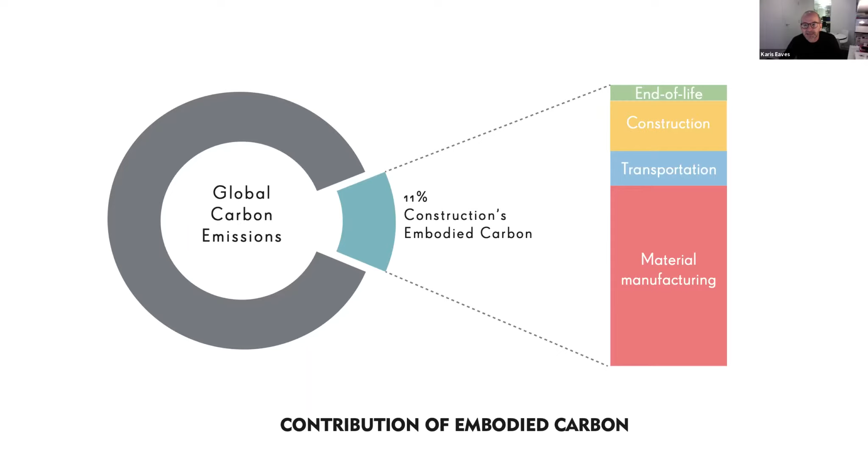We know that at the moment, primarily across the Western world, the carbon of buildings is measured through their operational carbon. Yet over time, as we get better at generating energy from renewable sources, we realize embodied carbon is going to be an increasingly serious issue from where we are now. So that 11% will very quickly grow exponentially unless we do something serious about it.

We know as construction professionals the kind of responsibility we have individually or collectively. This is thanks to Chris Wise, the engineer, for these figures, but it's applicable to architects as well as engineers. I don't want to put Kelly completely on the spot here, but going vegan for each of us consultants will save around 2 tons a year, reducing our carbon footprint. Yet an engineer is typically responsible for around 2,000 tons of carbon a year.

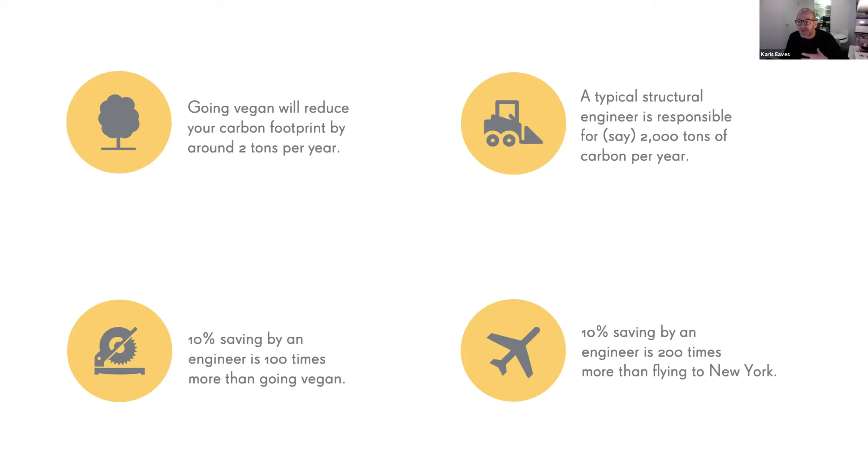By making a 10% saving in the embodied carbon emissions of your designs, you can make an engineer 100 times more vegan—essentially making 100 engineers vegan by doing that—and in fact save more than 200 return flights to New York. These are really direct issues that design consultants and people involved in the construction industry can immediately affect.

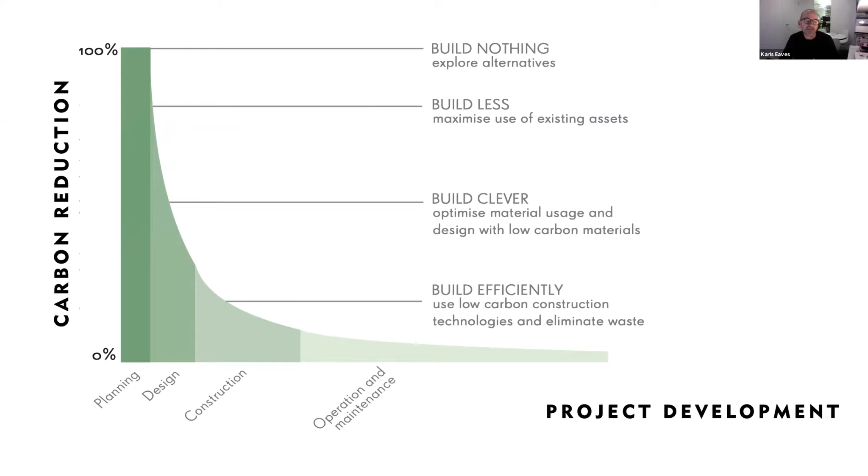We know that actually the best way of doing that is to build nothing: to explore the alternatives, to think about how we can regenerate and refurbish existing buildings, and build less, maximizing the use of existing building materials and buildings. Then by building clever—optimizing material usage, designing with low carbon bio-based materials—and building efficiently, using low carbon construction processes and technologies and eliminating waste wherever possible, we can be clever and smart about these reductions.

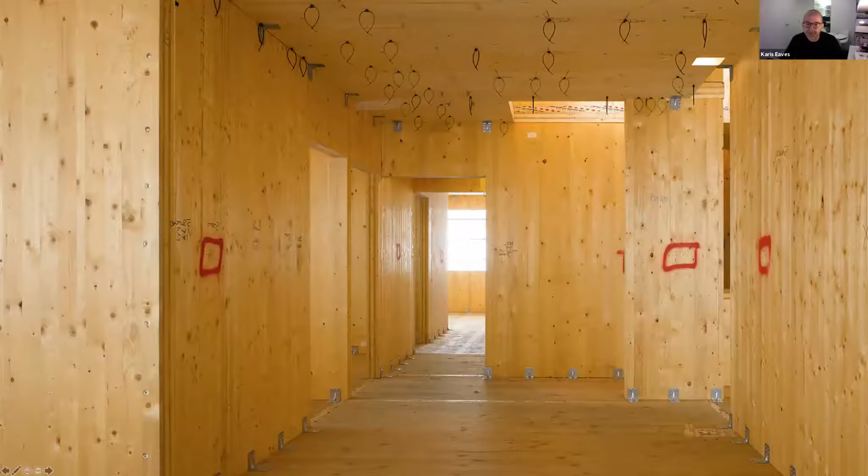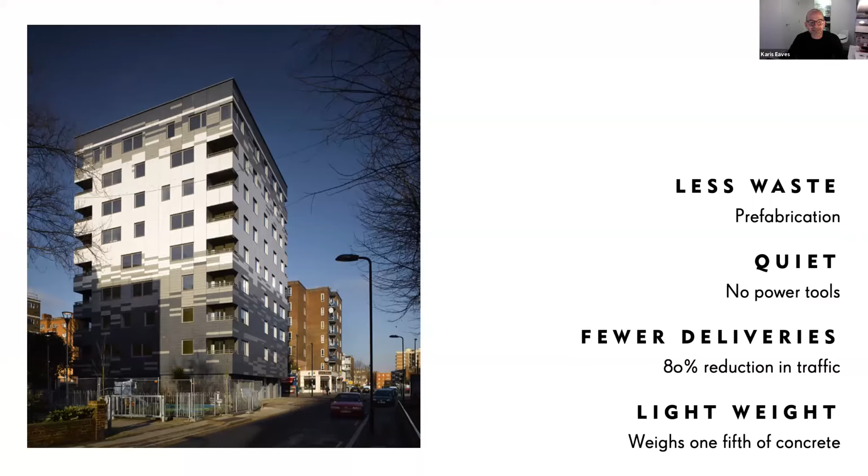For us as a practice, that started in 2008 when we built Murray Grove, a 9-story timber building, which was a wonderful, exciting process. Four people completed the entire structure in 27 days, and it was a very clean, lightweight, quiet process. The building is still there now, sitting beautifully in Shoreditch.

There's been quite a history since then. Since 2008, when we built that 9-story building, we've now more than doubled the story heights—even since I put this slide together a couple of years ago. Looking at 2019 with Mjøstårnet in Norway, which was 18 stories, but now of course we have buildings in Sweden of 25 stories and more being planned across the United States, and in Sweden, Scandinavia, and Switzerland. Really exciting, exponential history.

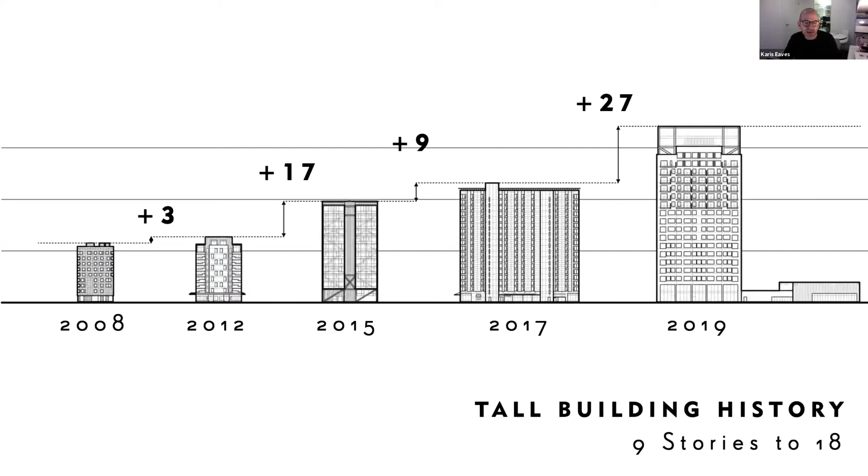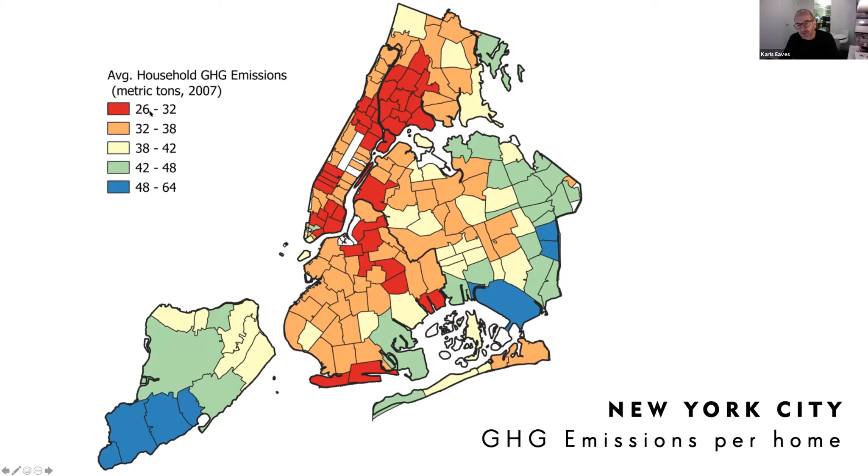But I think it's important to say a word of caution here about building super tall buildings. This shows the greenhouse gas emissions per household in New York, and we can see in Manhattan that the taller the buildings are, the lower the emissions per household. So we know that tall buildings are not terribly efficient in terms of operational carbon.

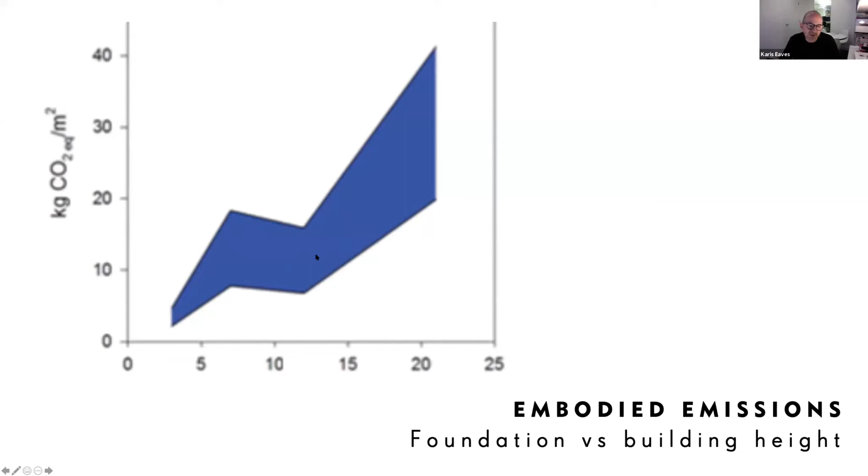In terms of embodied carbon, looking at the number of stories across the bottom and the volume of foundations and emissions from those as we go up, we know there are sweet spots for construction in terms of carbon emissions, which hover around the 12 to 18 story range.

Because this whole exercise is based on reducing carbon, we also need to be clear about that underlying principle of what we do.

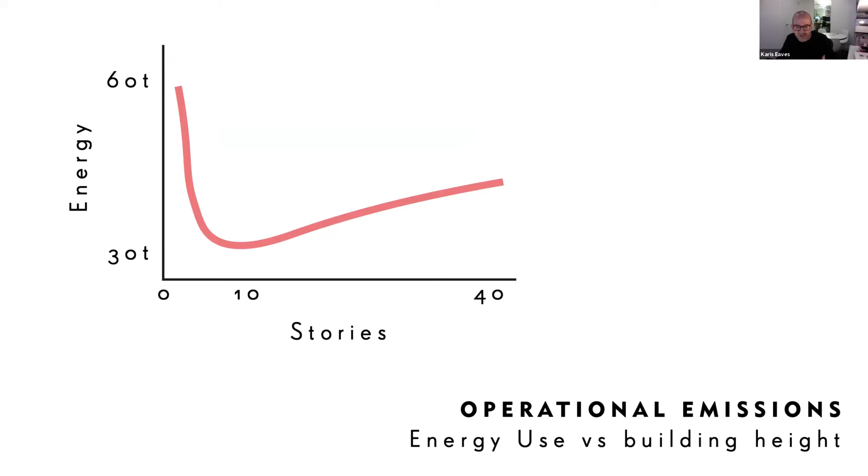We know that in places like New York, the average age of an office building is over 60 years old, and this is becoming fast redundant. Yet carbon-wise, we can't take these buildings down, demolish them, and rebuild in place. This is an existing embodied carbon store that we need to retain.

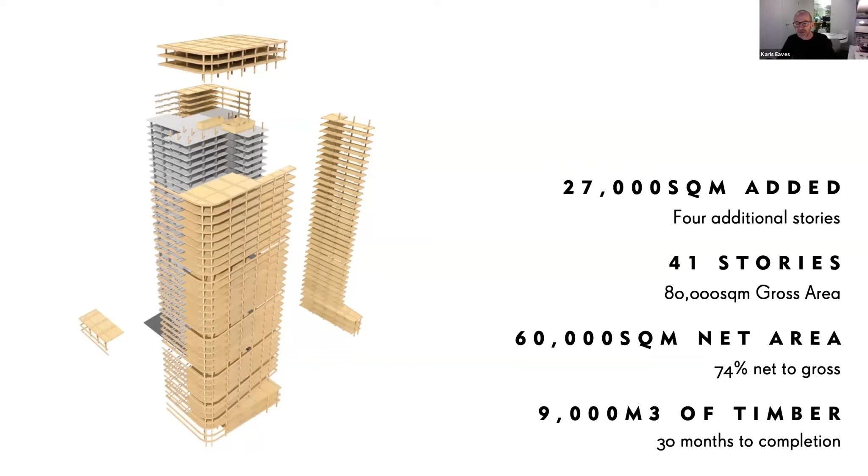So how we can extend these buildings, how we can increase the floor plates using the existing foundations and existing service runs, I think is a really exciting future for timber.

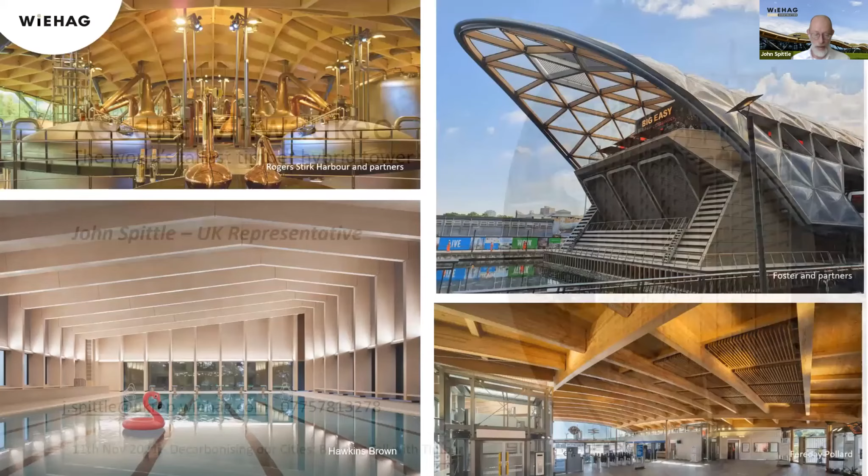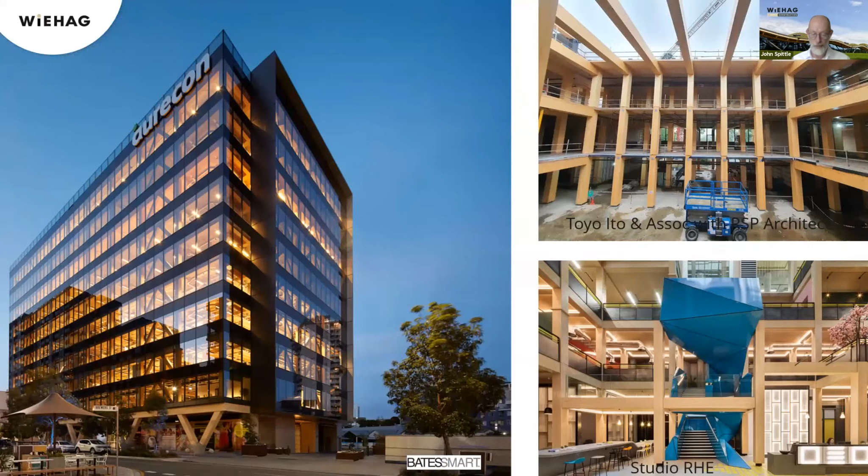The talk I'm going to do today is about WIEHAG's involvement in the world's tallest hybrid construction tower. WIEHAG are a long-established Austrian glulam manufacturer and subcontractor, and are well known in the UK for some iconic projects like the Macallan Distillery and the two Crossrail stations in London that we provided the roof structures for. But we've been making a name for ourselves around the globe, providing the glulam frame for multi-storey buildings, such as the 52-metre high 25 King in Brisbane, the 40,000 square metre floor area ABS building at Singapore's NTU, as well as the 10-storey redevelopment of the Import Building in London.

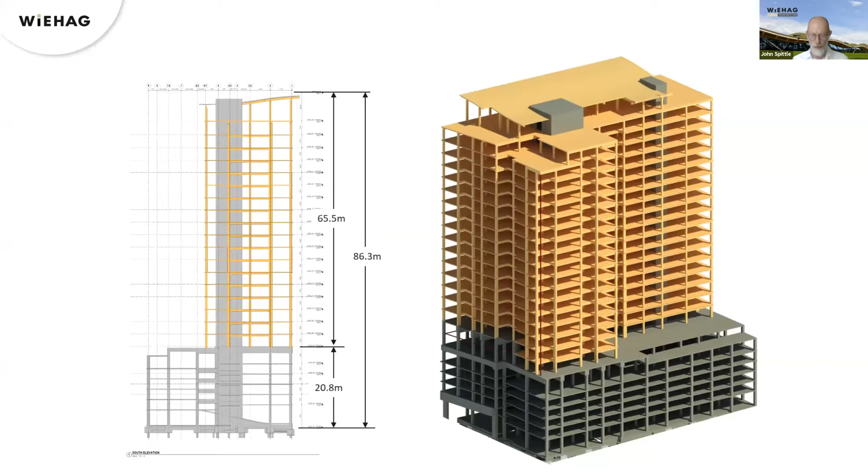For projects in Europe, we normally do detailed design, supply, install, but for projects further afield, we normally do just design and supply of the elements. That seems to be the most effective way of doing it. So this is the Ascent. It's a 25-storey new apartment block in Milwaukee, Wisconsin, and it'll be opening in July next year.

It's got six stories of RC, and then the concrete cores, and then 19 stories of glulam and CLT frame. And the image neatly illustrates how hybrid structures often are the best solution, and that timber isn't appropriate for all applications. And really, it should just be considered as part of the normal palette of materials to be used

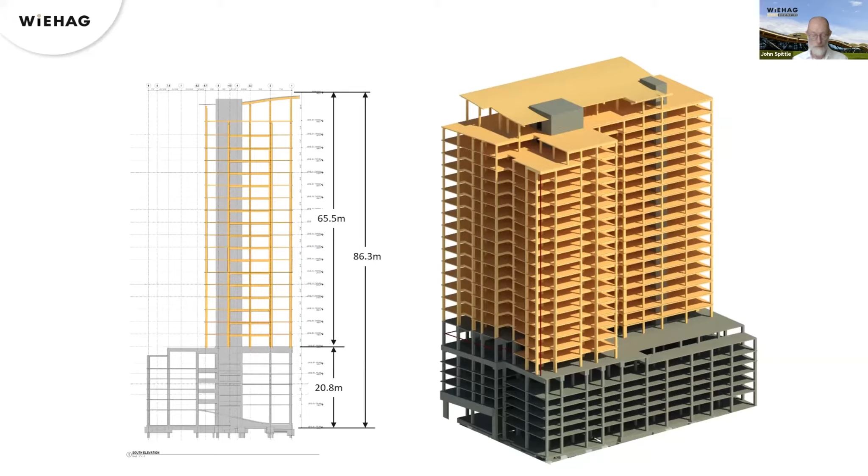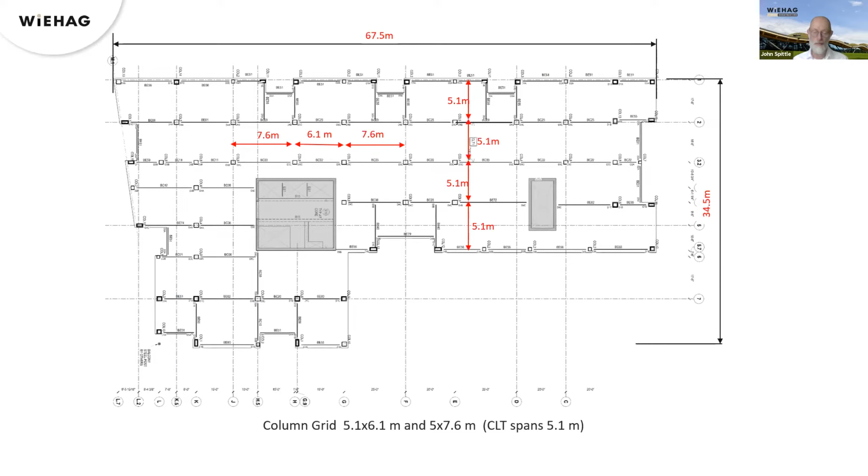in a project. It's always a balance between column centers and floor depth. With each project, you have to look and see which is the best combination. And in this instance, the column grid is between 5.1 and 6.1 meters, and 5 and 7.6 meters, and CLT spanning 5.1. So the one thing to get across here is that using timber doesn't mean having small column centers, reduced column centers, because obviously that's really important to the end clients.

There's no permitted path in the regs for a timber building that exceeds the height limit by nearly 200 feet. And it's interesting to contrast the pragmatic approach taken by the authorities when compared to that often encountered in the UK, as rather than just say that timber is a combustible material and cannot be used in the structure, they instead asked the team to robustly prove their design.

It does seem strange that in a country with such a great heritage of timber construction like the US, it should be buying the glulam and CLT from Europe. But whilst the US does have a large and established timber industry, it does not yet have the expertise or capacity for a structure at this scale using glulam especially. So following an exhaustive tender process, the contract was awarded to Timberlab, who placed the supply of glulam with WIEHAG, the supply of CLT with KLH, and the installation with CD Smith.

And really, to just say that WIEHAG supplied the product doesn't really cover the scope of works which we did, as it involved consulting and offering advice, technical feasibility and coordination, clarification on 3D models, which involved a lot of recurring tests on the CAD-CAM interface, preparing all CAD-CAM production drawings, including 3D models, and factory fixing all the connectors, and it included over 50 tons of connectors and fixings and countless screws.

And we also provided the fire protection to the glulam elements, and our package included all the logistics, including planning, container, transport and shipping. So it's not really a simple supply at all.

You know, when you're sourcing from a European country for a project in the US, it's not without its challenges and considerations, what with various different industry standards and approaches between Europe and the US. But there was this willingness to collaborate by all parties that ensured that these were successfully overcome. And it's not to underestimate the sort of challenges in that.

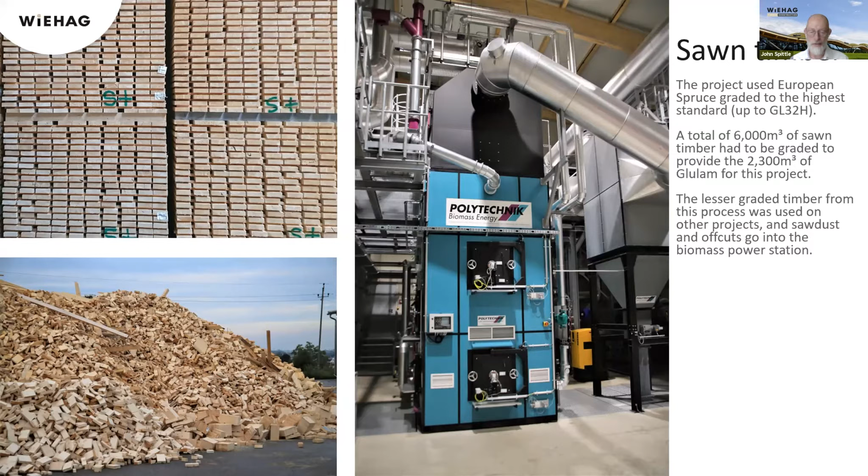The project used European spruce graded to the highest structural standard, GL32H, and so that meant that a total of 6,000 cubic meters of sawn timber had to be graded just to provide the 2,300 cube of glulam. And really the lesser grade timber wasn't chucked away, it was used on other projects that needed a lesser grade. And any wastes, sawdust and offcuts go into our biomass power station, which makes us self-sufficient on heat and electricity. So WIEHAG doesn't have any worries about gas prices.

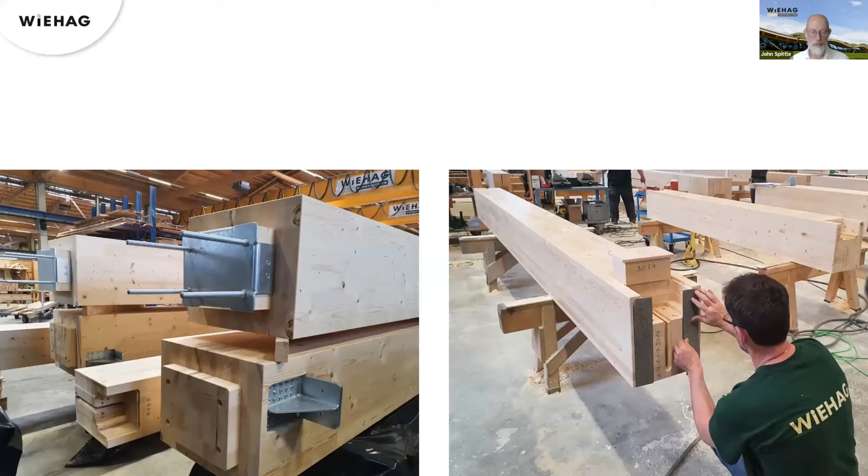There's nearly 2,500 glulam members in our package, and they're really chunky elements. The columns are 420 by 420, up to 420 by just over a metre, and the beams were 440 by 760, so really chunky members. And you can get an idea, really, it's maximum prefabrication. This is all about off-site, and it uses very advanced CNC machinery, and all the connectors are factory fitted, and we fire taped some of that, fire taping there. And so when they came to site, they got very fast and safe installation.

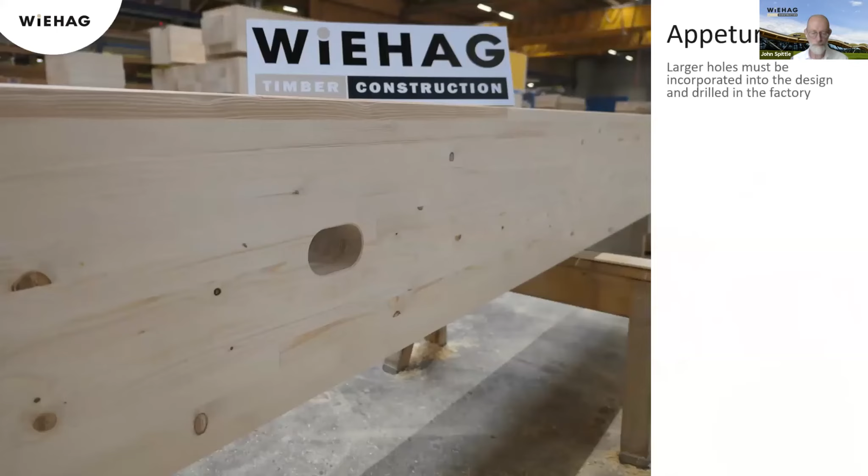This sort of illustrates, really, unless it's a small aperture, any sort of large apertures need to be made in the factory, and they have structural implications. So really you've got to design it in, and you've got to think about M&E and things like that a lot earlier than you would with trad build. And you can see here we're putting coatings on in the factory, and that gives a very high quality finish rather than doing it on site. In this case, it's an aqua varnish, and that helps protect the glulam during installation.

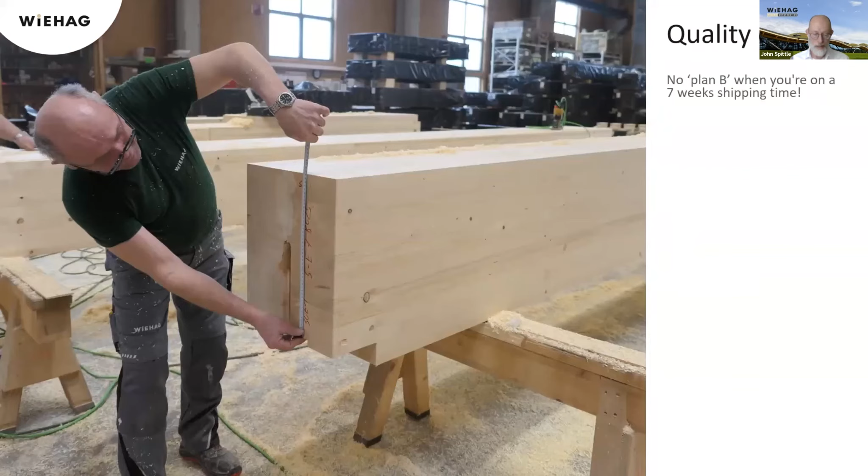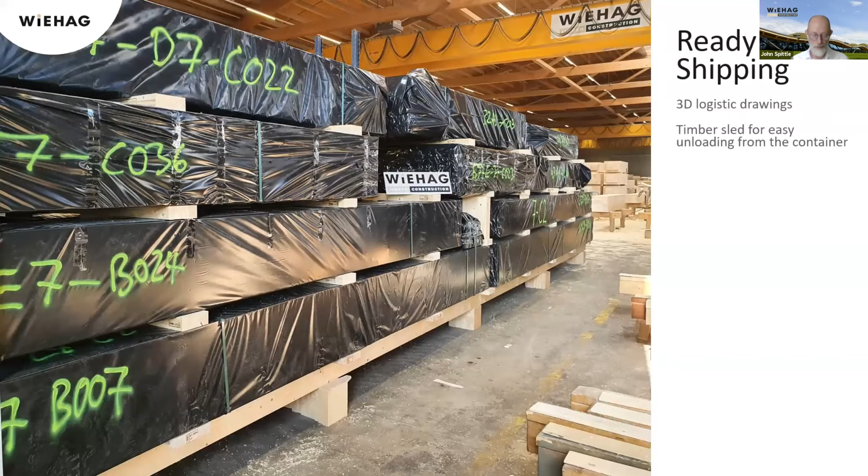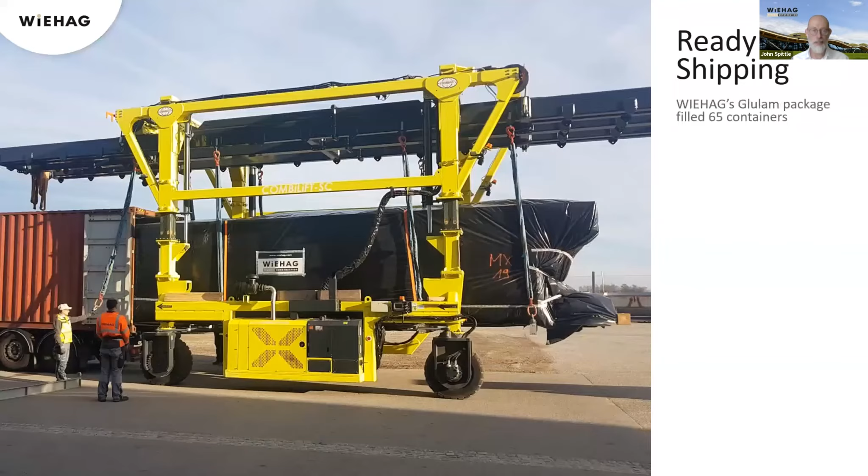Quality checks are carried out all the way through the production process, as really there's no plan B when you're on a 7-week shipping time. So you have to get it right. And it does force you to make decisions earlier; you can't make it up as you go along on site. You can see the members all wrapped and stacked onto special timber sleds that we make, and that's great for easy unloading. And we use 3D modeling to maximize each load and ensure it's stacked in the right order to minimize double handling. And then we use the sort of machines that you see down at the docks for loading the timber efficiently and safely into the containers, and that minimizes any damage as well.

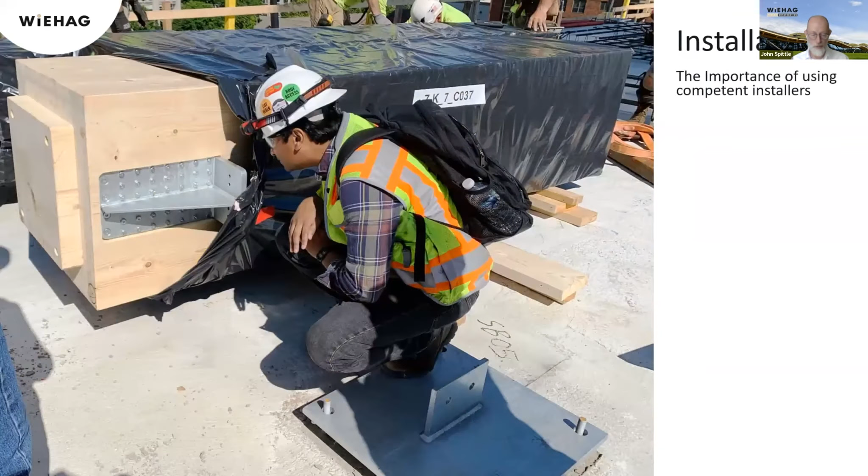When it then gets to site, what we found is it's really important to use competent installers, and the teams on the Ascent project certainly are. The timber structure on the project is going up about 1 story a week, including the CLT. And apparently they're using a quarter less workforce for the installation compared to an equivalent concrete structure. And also the total build time will be about 4 months less. So you can get an idea why people are using this type of product. It's not just about the sustainability side.

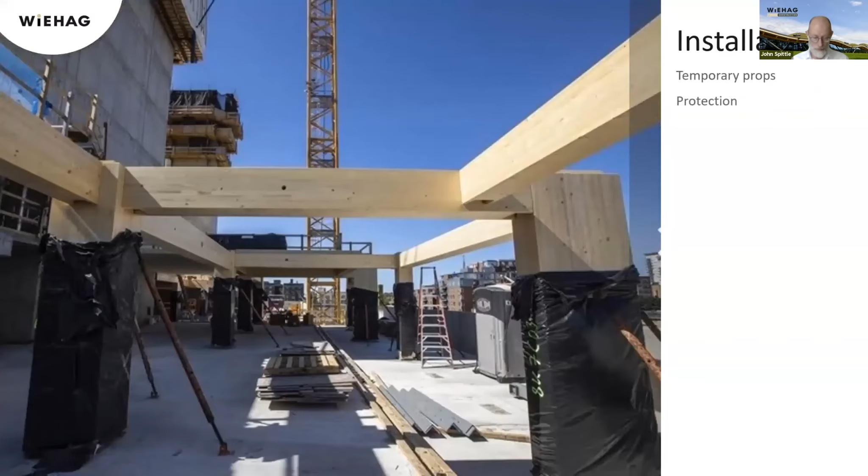The design is a post and beam construction with the columns being 1 story high. And you can see how discrete the connections we provide are. And you can note the temporary propping, and what's really important is that it doesn't fix to somewhere that's going to be seen when they're removed, because you can mark it. It's important to protect the structure during construction and really get it watertight as soon as you can. And you can see here they've left the polythene on around the columns, which is not something we'd normally do, but it's going to be taken off very shortly.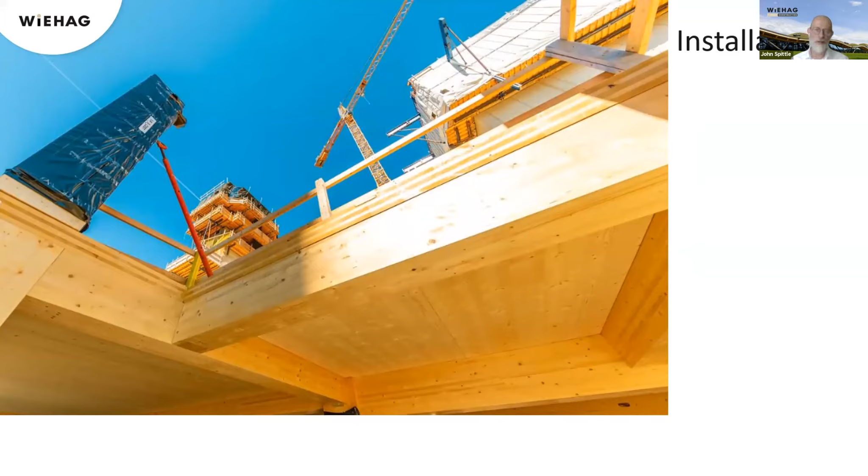This type of off-site construction uses high tolerance products, and that means less snagging and no wet trades. And other trades like M&E can find it much easier to fix things to than an equivalent structure. You get an idea of how the timber looks in its natural state there, a very attractive appearance.

This project was a great example of collaborative working, bearing in mind that it has taken place during a time of incredible challenges, what with pandemics and ships getting stuck in the Suez Canal. And it really is a credit to everyone that's been involved in it. It's been a real pleasure from our side.

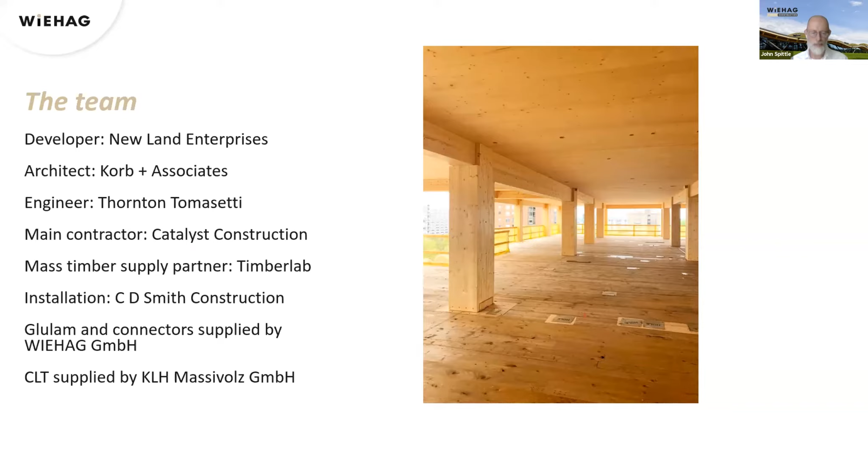And really, as the project nears completion, ready for its opening next year, it's interesting to reflect on how other countries are pushing ahead with multi-story timber builds, whereas the UK, after really leading the world for the last decade in pushing the boundaries with timber engineering, now seems to be sliding back to traditional forms of construction for multi-story structures, despite the ongoing climate emergency. Anyway, that concludes my talk today.

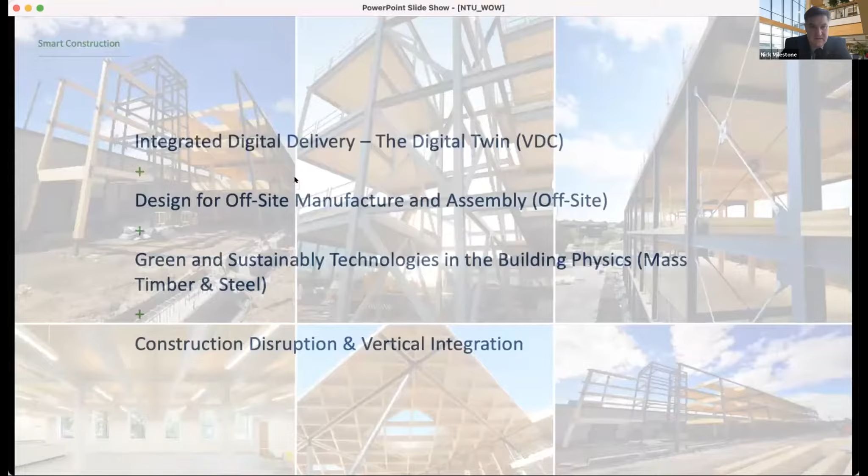So thank you, a little bit about me. I've been blessed in my career. I've been in construction 36 years. I've been involved in many major projects across the globe in mass timber, be it in North America, Singapore, and predominantly here in the UK. It's just been a great journey.

What I'm seeing now is such a big demand for mass engineered timber products as we're addressing the global climate challenge effectively. So what I'm pretty passionate about is my own roadmap, which is about integrated digital delivery, DFMA, green and sustainable technologies, and above all else about construction disruption. CLT especially has been the disruptor in the last 20 years, giving us the ability with BIM and offsite to start engineering these wonderful structures.

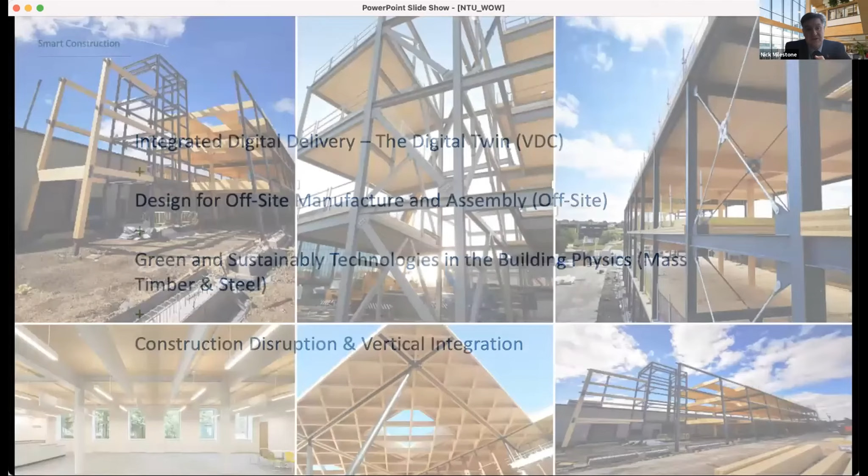You can see here there's very much steel and mass timber together. This is my foot in both camps, more because they are symbiotic. They are designed, manufactured and constructed within 2mm tolerances wherever on the planet. And that makes such a huge benefit.

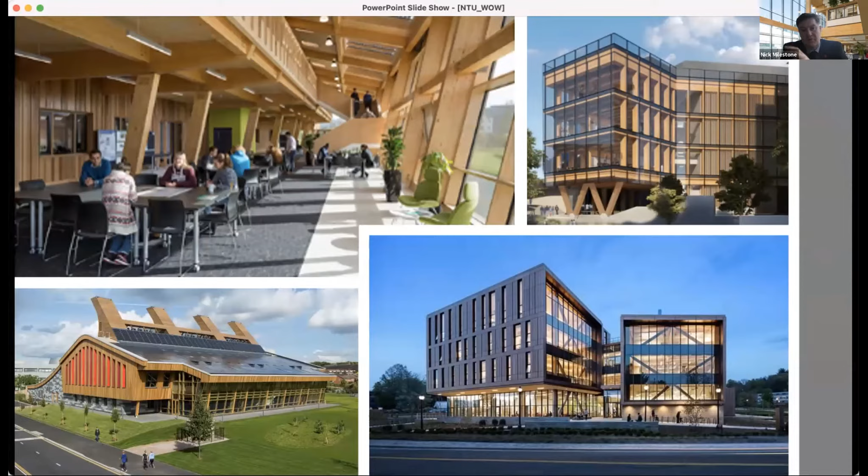It allows us to use form and function across a variety of buildings, but it's the iconic buildings across the planet that are starting to achieve global recognition, whether that's office buildings in London, Oregon, or Sydney, Australia, to residential towers in London, Vancouver, and Sydney, and even universities. They're often the start of a pioneering journey in any country.

We're starting to see CLT especially become a much-used floor plate more so than walls. We're seeing that now with light timber frame in the US, CFS or light gauge steel here in the UK, and long span structures as well. You'll see quite a few familiar buildings where structural steelwork is the obvious material of choice because of span depth reductions. We can go more open span using cellular beams for services integration and the like.

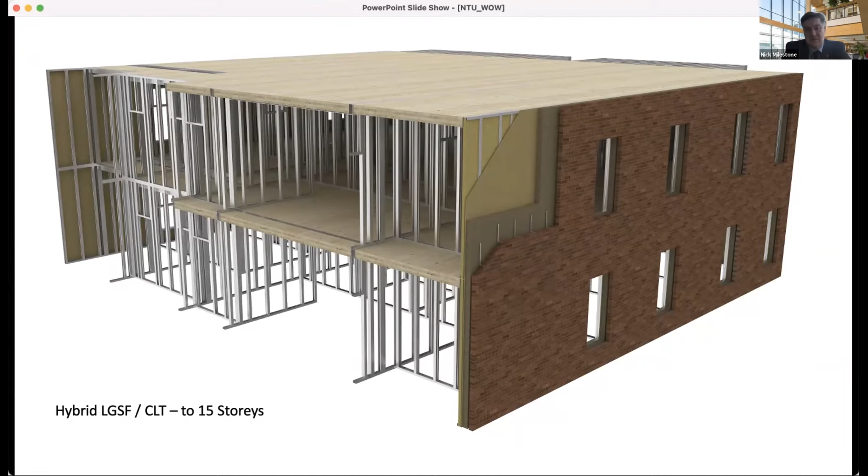I'll just show this very briefly - Kelly's going to talk more about this. This is a project we're working on since Grenfell and the minimisation of using combustible load-bearing materials vertically, internally and externally. It doesn't prevent us from using cross-laminated timber as a structural floor plate. This is something we've developed - we can go up to 15 stories. I think in the next 18 months you'll start to see this rolling out more in the UK.

So what I'm going to talk about today is the Nanyang Technology University in Singapore. For me, this is a very personal journey, spanning over 4 years. When I moved to Singapore in 2017, within a day of landing I was in a meeting with RSP Architects and Toyo Ito discussing this, and this effectively is a ground scraper.

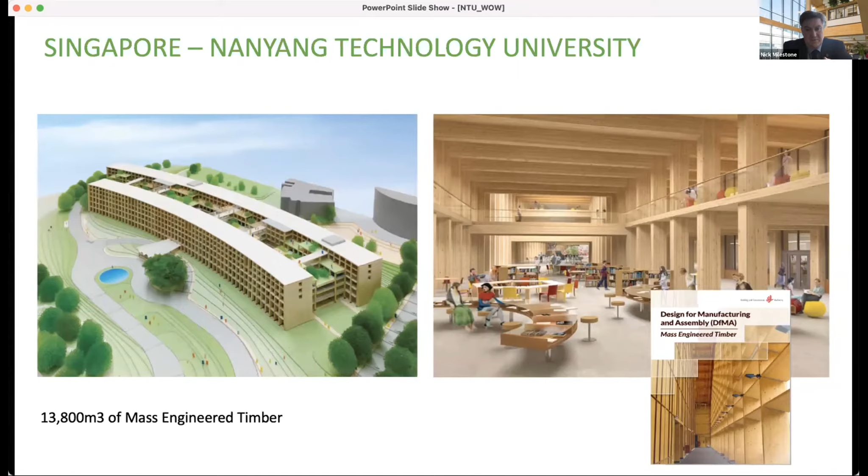It's about a total net area of 45,000 square metres. It's 6 stories high, a simple beam and stick, and the client was insistent that he had the right people in the world to deliver it, which brought many, many challenges. This is all from the DFMA handbook from the Building and Construction Authority of Singapore, focused on mass engineered timber.

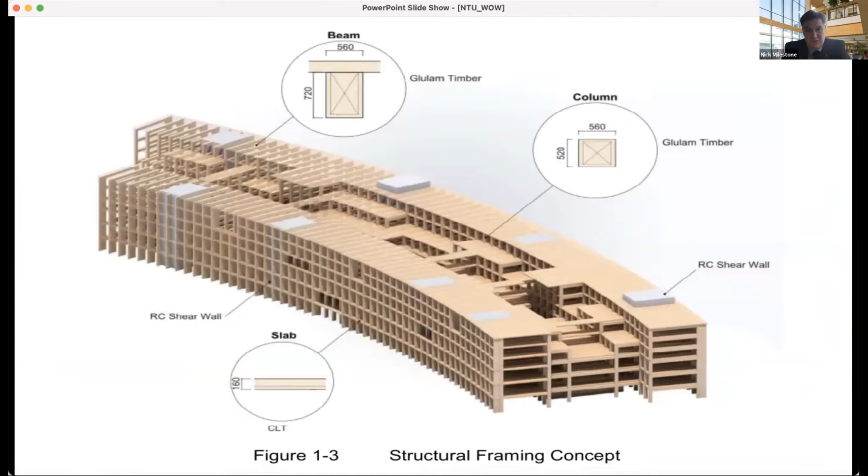So if we look at the structure, it's actually quite relatively simple. We've got a 160 mil thick slab. In the majority of areas, we've got 560 by 520 square glulam columns - you can't get any sweeter than that. But how do you shift nearly 14,000 cube of mass timber from Europe to Singapore logistically?

So what we looked at was, okay, how do we scale it? This goes back to July 2019, and we set ourselves these challenges: how are we going to scale the structural design, the BIM modelling, the glulam, the CLT, the screws, the transportation, the logistics, the management in both Asia and Europe, and the site labour who's going to build it?

So Newcon, the principal contractor, was nominated to build the job. SteelTech, a subsidiary of John Seng Construction Group, was nominated to do the MET design and installation, and I was part of that journey. Then when we move forward a bit - sorry, I've just frozen again.

Sorry, I just have to escape it. I think it's my Wi-Fi locally here.

Here we go. So how do we scale up? Well, we had to look at who had the biggest design houses. For design and detailing, we looked at Eurban here in London. We had to split the model up, it was that big. So we used Eurban from London and Cadmakers from Vancouver.

We worked with Wiehag to manufacture and deliver 6,100 cubic metres of glulam. We worked with Stora Enso to produce the 46,000 square metres, or 7,700 cubic metres, of CLT. Screw-wise, we had 1.1 million screws on the project, procured with Rothoblaas in Italy, but they actually came from Taiwan.

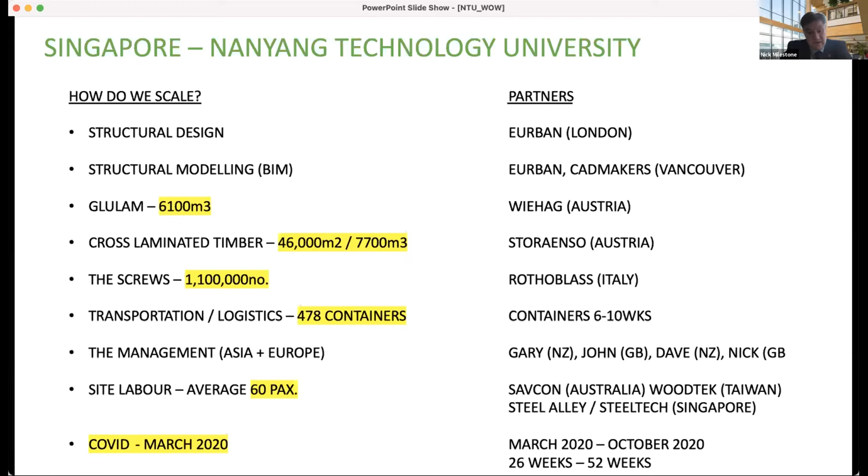The general contractor just wasn't ready. And with the impact of COVID, and its first, second, and third wave, it impacted the production lines at both Stora Enso and Wiehag, and that had an impact. That effectively took us from a 26-week planned program to an actual 52-week program. So it had its challenges.

But when we look at this, this was the first mock-up we did back in mid-July 2019, and this was just one small box. We realized the sheer scale and size, because we weren't just doing whitewood spruce, we were doing larch as well as the fins. And that's what really put the enormity on the project.

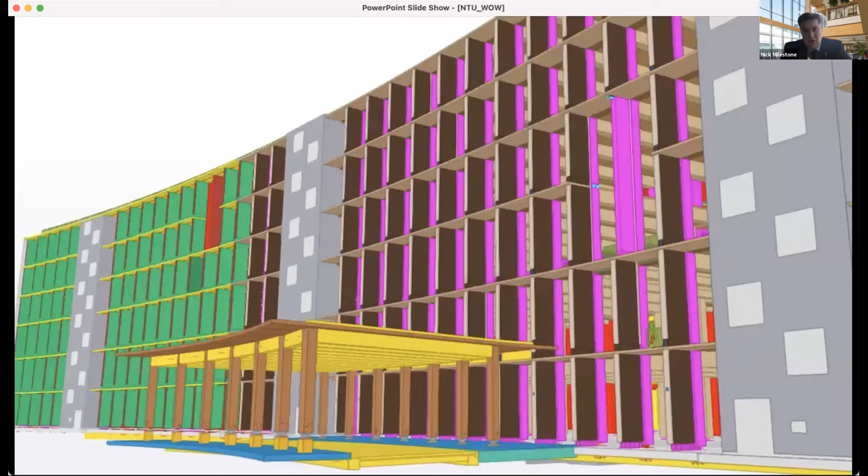So we modeled it in VDC, a full BIM model. And that took us to absolute detail where everything was accounted for. We knew exactly where every screw was going, how the interface worked. We actually did headset walkthroughs, and we did augmented reality for the client so we could walk through the details. It was so important, and it showed how advanced BIM was to allow us to do this.

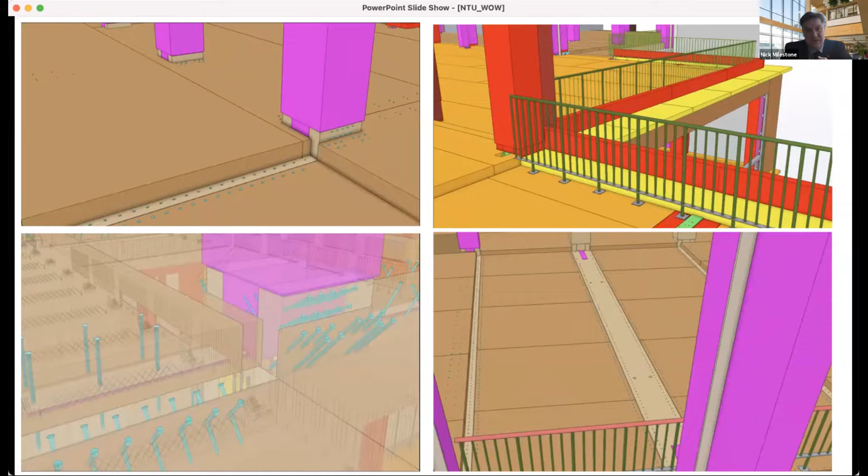But then we had the realization of taking the materials from Austria all the way to Singapore. If nobody's familiar with where Singapore is, it's the southernmost point of continental Asia.

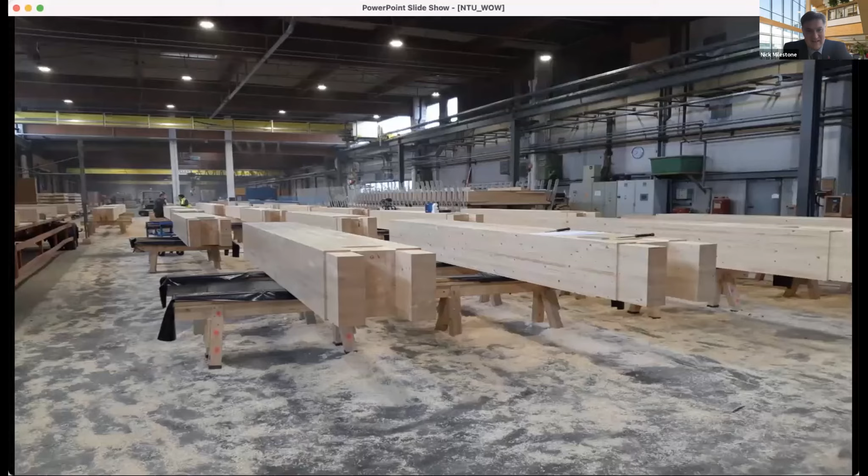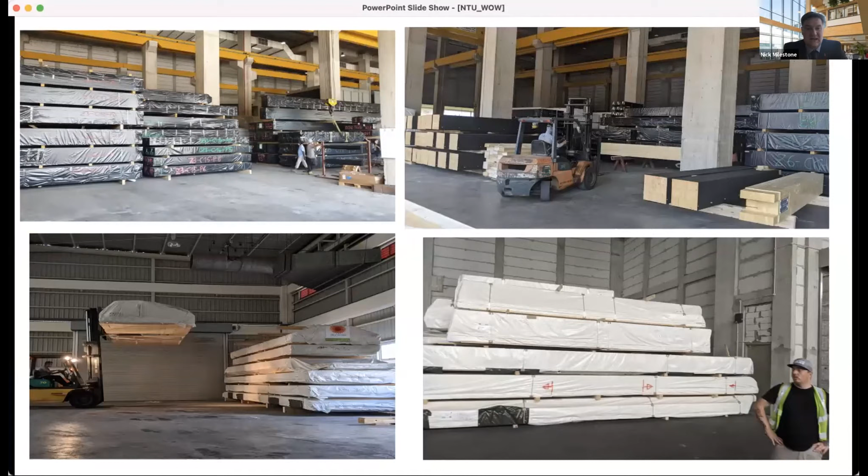So here we are in Wiehag's facility doing our glulam columns, and this is the CLT coming from Stora Enso, and we had some seriously huge storage facilities. Thankfully, John Seng had their own integrated storage depot in Singapore, so they unloaded the containers for us, and we had the materials in, well, pretty much sometimes finding a needle in a haystack.

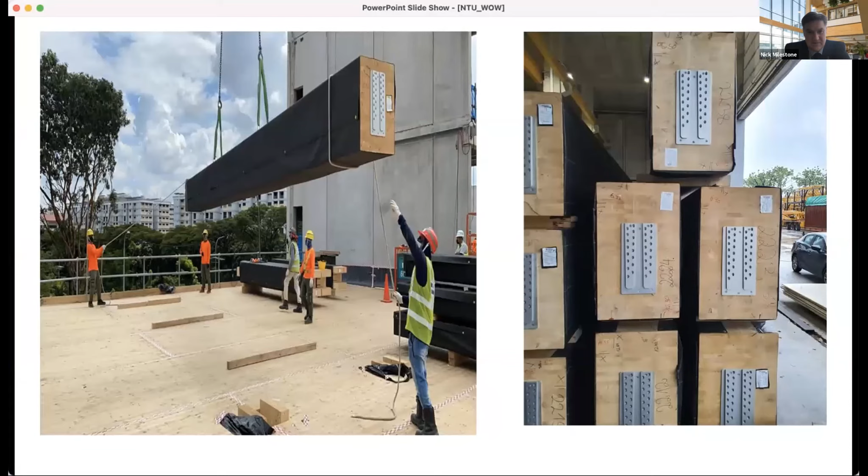You see in the bottom right, there's John Byrne. He's a very experienced mass timber erector from the UK, and this is crazy Dave Kingham. Without Dave, we wouldn't have got through this project. Dave just lived and breathed this project 24 hours a day, and he was absolutely key to the success. Some phenomenal innovations came out of this.

And I show this one specifically. These are proprietary connections. We decided to get away from traditional fin plates and through-bolts, and get away from ugly connections and encapsulating those bolted connections, to use proprietary connections that just slotted into place. Yes, we had to put tension plates on top, but it absolutely made a difference to the speed of construction.

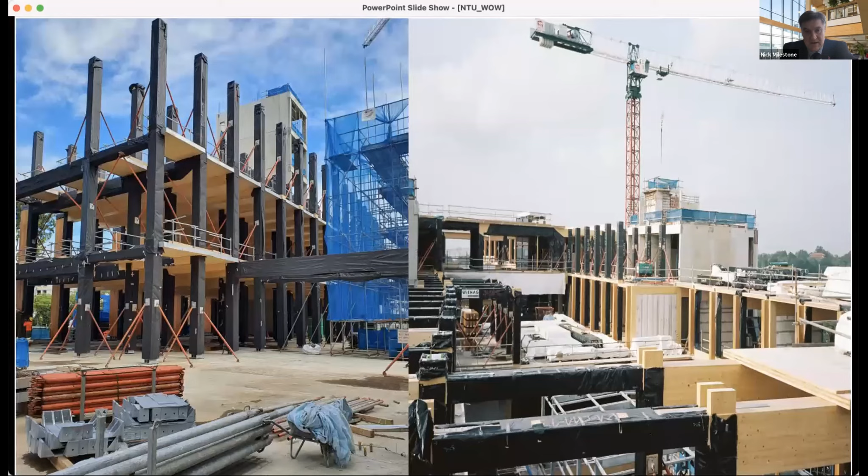We kept the beams and columns wrapped as much as we could because of the high UV in Singapore, though it had both a UV and a termite coating on. The project, wow, it was just phenomenal at scale and size. We kept the wraps on as much as we could, as long as we could. That was absolutely so important.

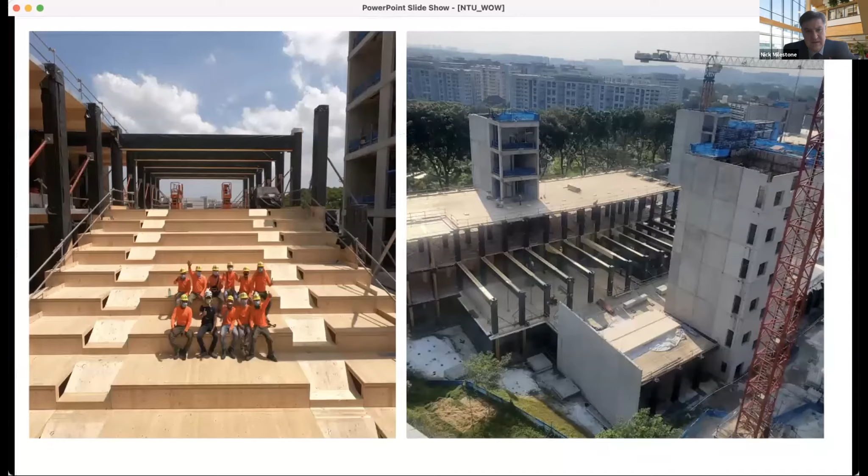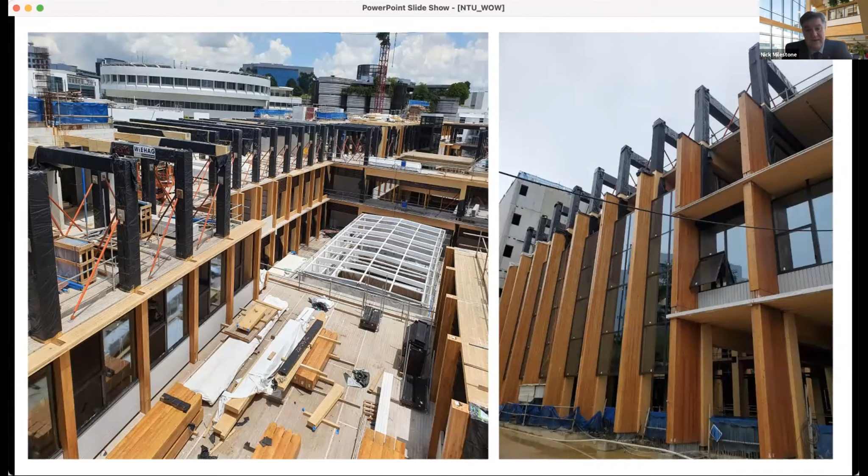And here we are, it's just starting to take shape. It's built around 6 concrete cores. It's a lovely integration of concrete and timber working together, despite the tolerances of precast concrete. Here you can see on the left some of the guys on the lecture theatre floor mixed in with some structural steelwork. But you're starting to see the larch exposed, and we were very much against having materials used in a class 3 environment because of the rain and sunlight. But they've got 4 coatings of UV, which will have to be maintained over the years, but it was there, so we used larch so it wouldn't degrade as quick as whitewood spruce would.

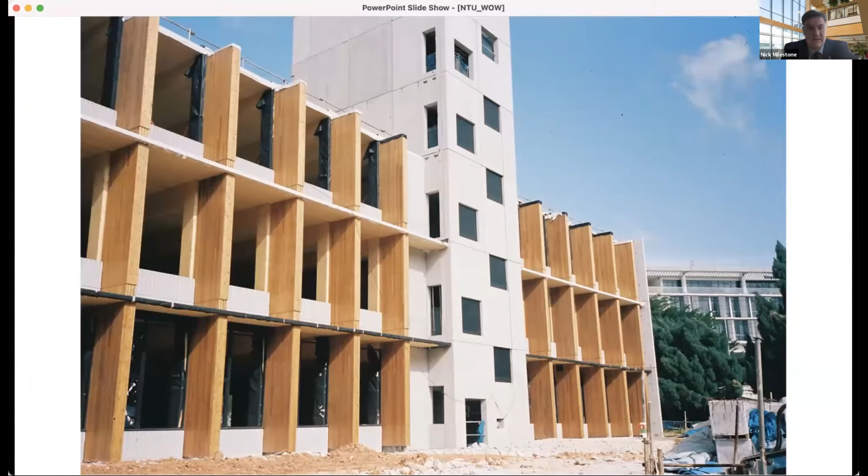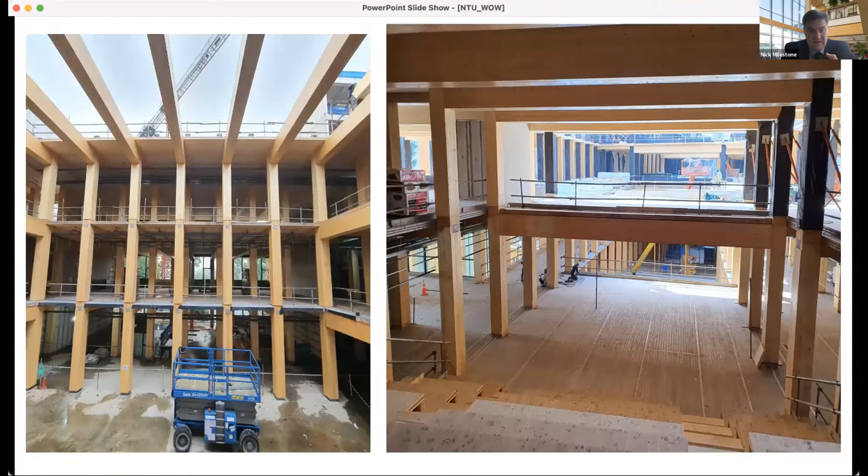And it's starting to take shape. This was probably around March 2021, and we're starting to build it. We're building the lectures, but you can start to see the connection free in the columns to the beams. And this is what really captures the eyes, that it's not as industrial as once anticipated. Similar to what John showed, 3-story height columns coming through, but it was just an endless forest of columns and beams, very symmetrical, very set out, and actually very straightforward to install. And it actually went incredibly quick.

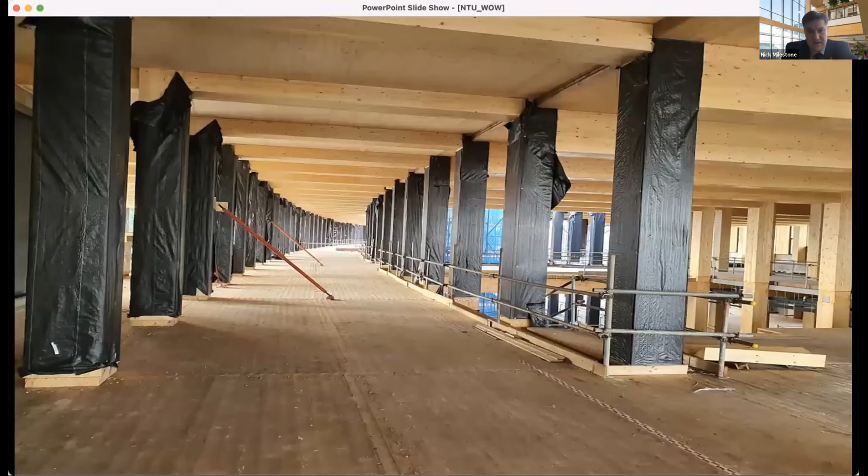And we kept the wrappings on as much as we could because we were dealing with a new client, a new industry not familiar with mass timber, and people would just treat it like steel or concrete. Well, it is the finished article. We have to treat it like furniture. And it went up, and it went up exceptionally well.

And boy, did we have some screws on the project. Even halfway through, we tried to value engineer it just to remove the number of screws. It was more based on the diaphragm and the vibration action between the CLT and the glulam relationship. And we went through a lot of tape as well for rainwater management.

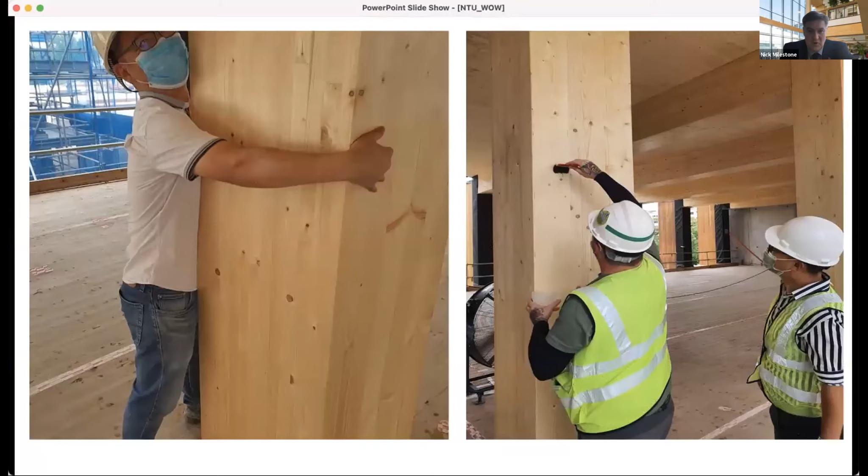What did we do when we look back on it? The locals, they fell in love with wood. We taught them to love wood. We taught them how to look after the wood and do repairs going forward.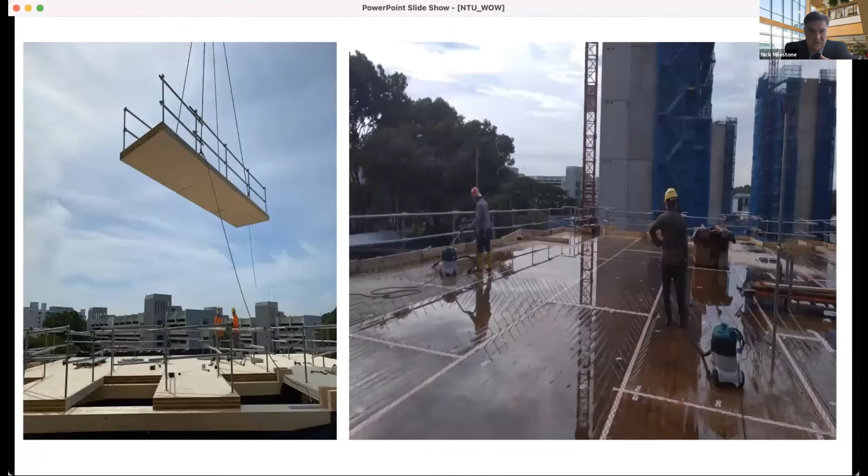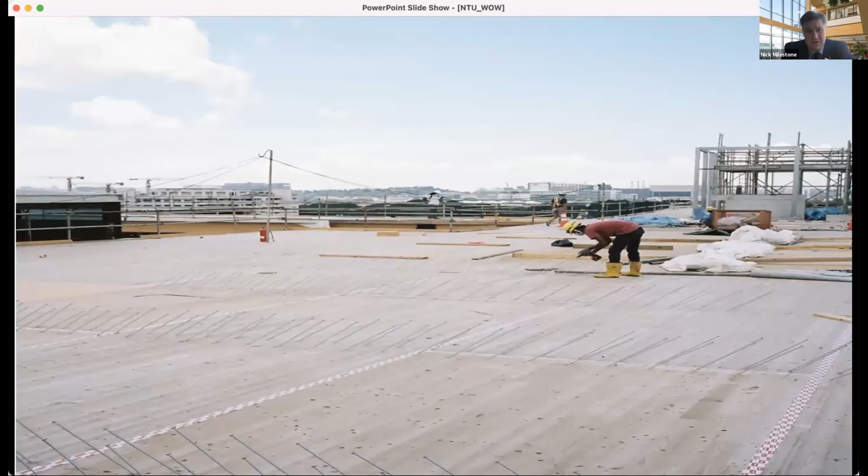We did some great stuff with edge protection. We made it safe. I mentioned the rain, and there's the rain. It rained. Singapore endured its worst rainfall in 42 years. And this is a country that rains a lot and doesn't have a rain, it has a tropical downpour. And wow, we must have spent as much time with the labour just absolutely keeping it dry. And yeah, did I mention the screws? There was a lot of screws.

It was challenging. Gary, who I mentioned, very sadly, tragically passed away just before construction started. So we had a fallen hero, and we very much remember Gary for this job.

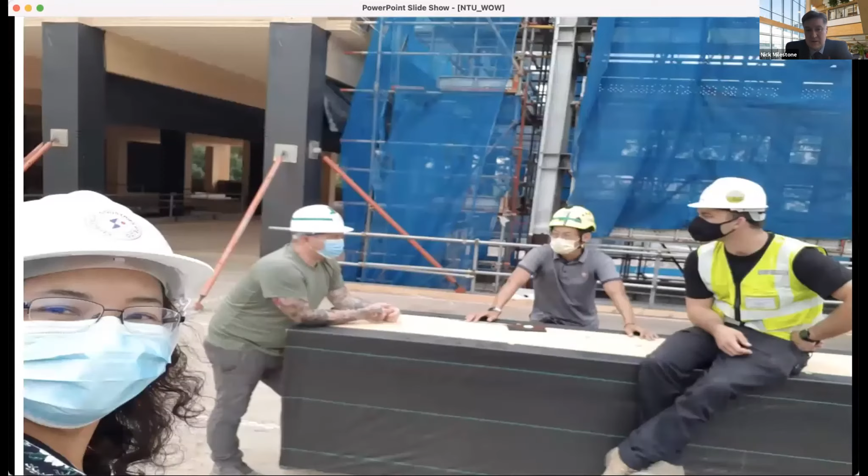And this is where people, the characters, stepped up to the mark, like Dave King. And without these people, we'd never have got these jobs built. So we kept focused with Marla, our QS, John on site, myself here in the UK managing the European side of life, and Dave. And last week was the installation of the last panel, and it was an absolute success and a testament to the 52 weeks for all those guys who lived and breathed it.

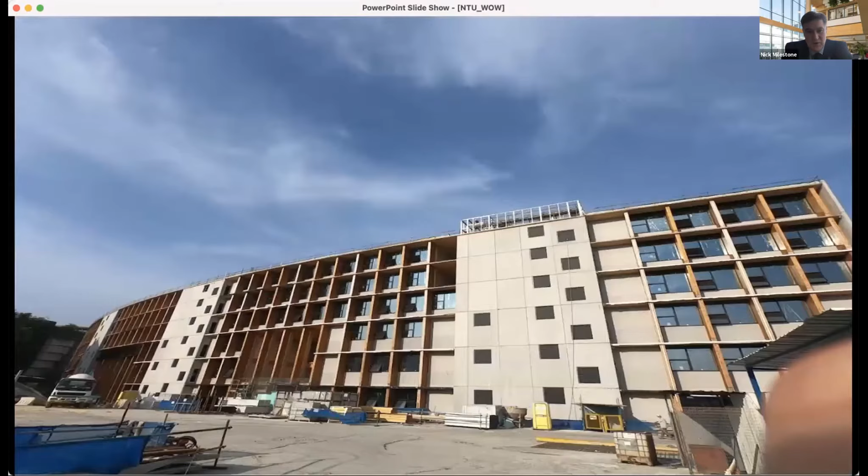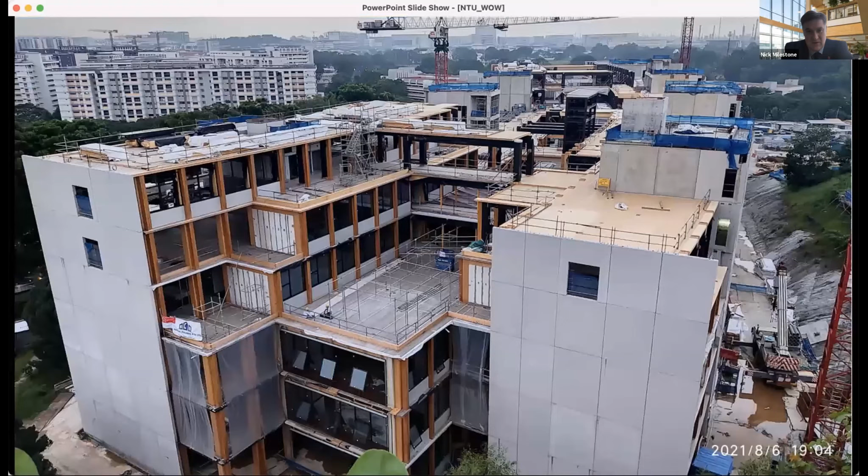And we tried to get some really good images of how it looks, but because the building is just so big there's not a great angle to pick it up. But you can see the enormity and the scale of the task that went into building what is classed as Asia's largest timber building. When you look at the sheer volume, it's the world's largest timber building of single use.

And yes, we even had the stuck ship in the Suez Canal, and we had 17 boats floating around the Mediterranean with all our materials on, wondering how we'd get there. But we got there, and it was an absolute result. So it's just been great.

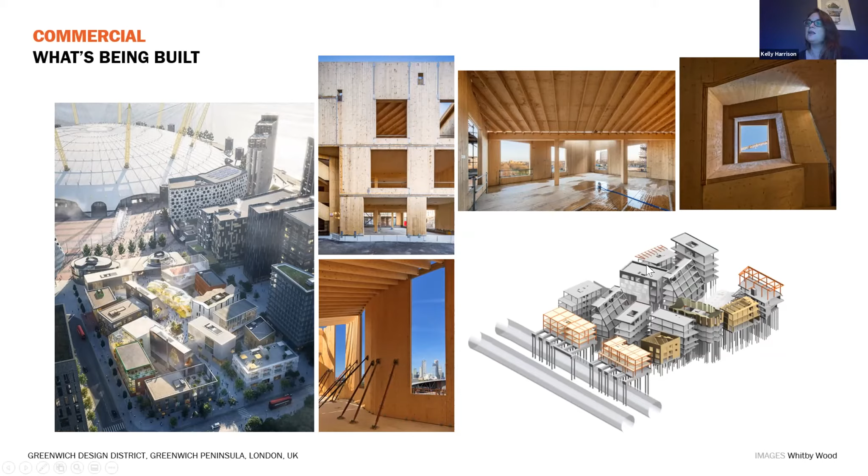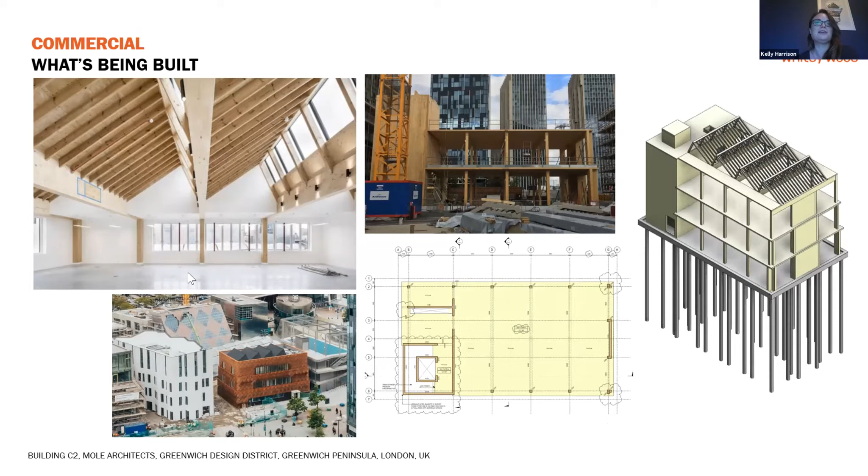And it's interesting, having spoken to a few of the different architects and the client, that perhaps if this development had been conceived currently rather than a few years ago, a lot more of these buildings would potentially be timber compared to what was actually built. But there were some really lovely shapes, some really lovely moments - they're really beautiful buildings, I think. Having gone to the opening and seen a dance performance in this space a few weeks ago, it was really, really lovely to be in there.

But this is what we're building at the moment.

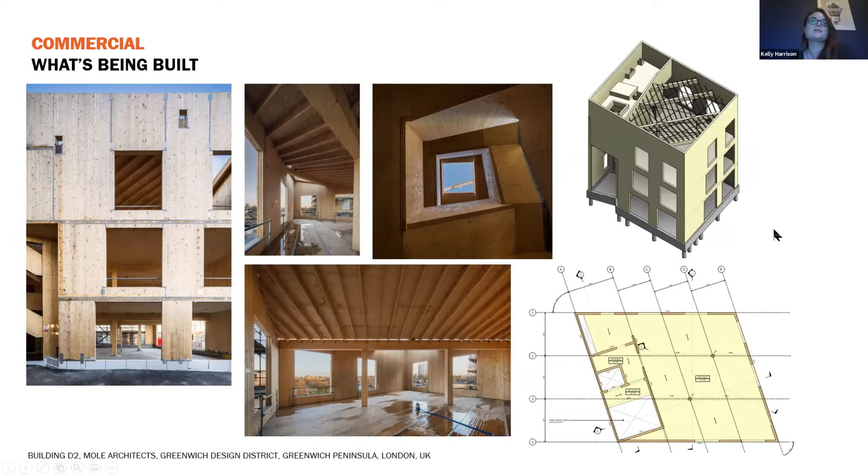There are some more projects. Andrew Waugh's got a fantastic one in Shoreditch, a 6-story LVL, glulam and CLT building. So we're going up to 6 stories. But what can we do? And where can we go?

We've been looking with Waugh Thistleton Architects at a couple of projects recently where we've been really trying to find a solution for residential buildings post the ban on combustible materials in the facade over 18 metres, and seeing how we can still use mass timber effectively. So here's a quick example of how we would have built CLT pre-Grenfell, with CLT walls and floors stacked on top of each other.

All of the walls were load bearing. And then you'd first think, how do I remove the combustible material from the facade? So perhaps you'd put a steel facade around the edge, which could be a light gauge steel frame or a hot rolled one as needed for the geometry or height. But then we're looking at this and thinking it's so much material, lots of different trades, construction sequence issues, lots of details, and it gets expensive. And we can do it.

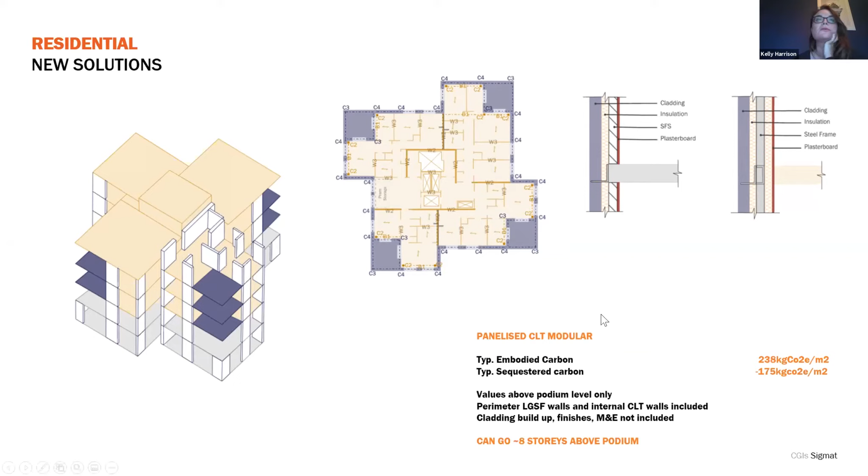Nick Milestone alluded earlier to this solution he's been developing at SIGMAT. We at Whitby Wood, historically, have done a lot of reinforced concrete residential projects, and we've seen a big turnaround in the materials market changing recently. A lot of contractors now want to do light gauge steel framing rather than RC wherever possible. So I really like this idea that we can go with light gauge steel framing. We get our walls already built.

It's the same system as CLT really, but your exterior wall plus all your interior walls are non-combustible. By using the CLT slab, you're reducing the weight and loads, therefore any transfer decks or podium slabs, and the foundations below as well. We've been looking into the embodied carbon numbers, the sequestration, and figuring out how these details might work for disproportionate collapse, fire situations, and where we might have to hang balconies off and support facade work, brickwork, etc.

I think it's a really interesting solution, but as Nick mentioned earlier, it goes up to about 15 stories, before the loads would be too high in terms of vertical and wind loads on the metal stud walls. But it's nice to think that a CLT solution could really start to make an impact.

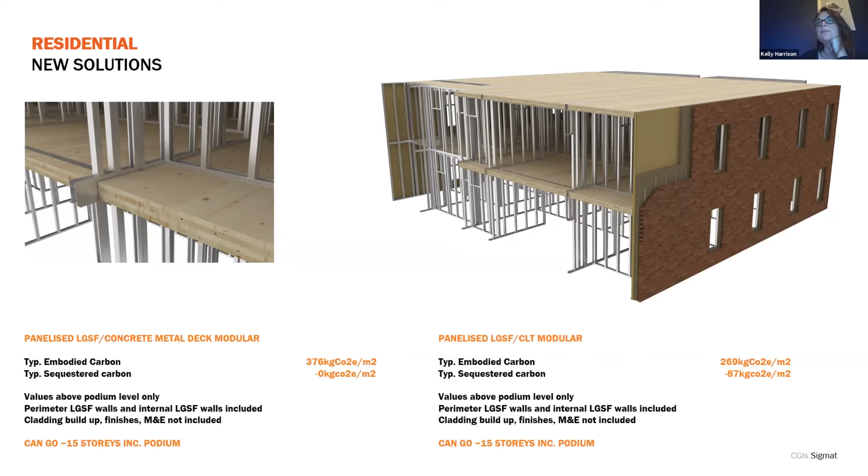At the moment, this would be built with a metal deck slab, which is obviously a wet trade, and you have to wait for it to go off before doing the next floor. I think we're talking about some serious program benefits as well, keeping it all dry and taking the wet trade off the critical path.

But then we're thinking, what happens when you go taller than 15 stories, and what can we do there? Being involved myself not only at Whitby Wood as a structural engineer, but also as a former director of TRADA with Nick, and now having moved to Timber Development UK, you get exposure to lots of projects all over the world, and listening to webinars like these a lot over the last few years.

I came across Brock Commons, for example, in Canada. We've got an 18-story building there, and it's got no beams, it's a flat slab. In that building, the columns are at really close centres because they're supporting the corners of each panel. But we found, speaking to Rothoblaas, they've got a new connector, which we'll show more on the next slide, which means we can actually start to increase that spacing and get a two-way CLT solution to work with columns at bigger centres.

So here, similar to the grid sizes that John was alluding to earlier, we could look at something like a 5.5 metre grid. I think they go up to 7 meters, but if you want a really efficient system, you might want to base it on a standard panel size.

So we found a 5.5 meter grid in one direction at least worked very well for setting out the building and setting out the panels and the columns, and getting a flat slab CLT solution to work. And that worked by the different layers working in different directions. It works in the same way as an RC slab in that manner.

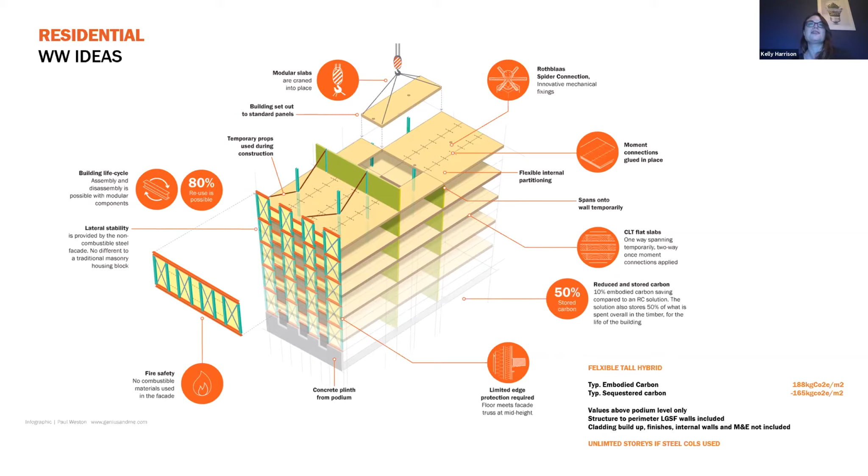One really big one was, I got one of these spider connectors delivered to the office, and it was huge, but it was the highest capacity one, I'm told, so that must be why. But one of the big issues, these are some images here from Rothoblaas, is that it screws in from the top. So what happens is the vertical load from the columns transfers through this bar in the spider connector, but the loads from the slab are all picked up by these legs, which I suppose are the spider's legs, but I've not quite understood why there aren't 8 and there's only 6, but I'm sure I'll find out at some point.

But yeah, the long Rothoblaas screws that go into these screw head holes here pick up the load of the slab and transfer it back down into the columns, but they're installed from the top. So as you're laying down your slab, how are you safely installing it without propping everything all the way up as you go, like you would in RC construction anyway, which would then mean it's no better.

So the way we dealt with that was we designed the CLT slabs under construction loading to span from the facade onto a temporary support or an internal wall line that would be decoupled later, so the CLT spanned quite a long distance in the temporary case, and then for its permanent loads and for the vibration and deflection cases, which usually govern your thickness of CLT, the columns then came into play, and we decoupled the temporary support wall, and that was designed to support it every 2 stories to keep the construction going as quickly as possible.

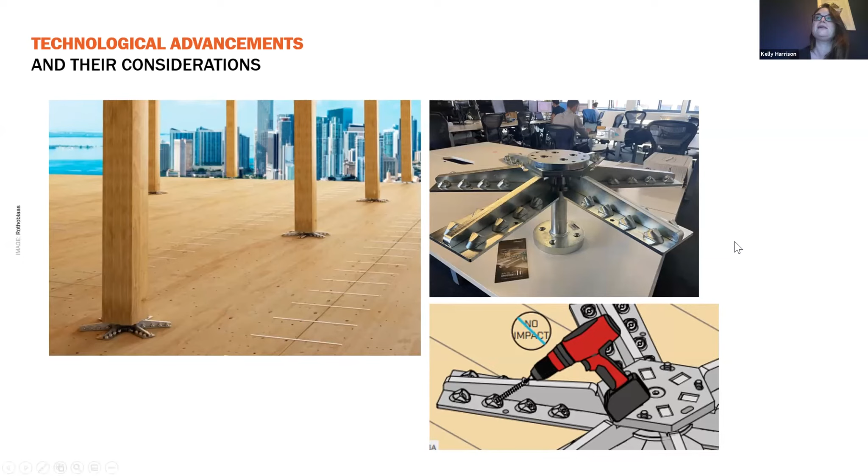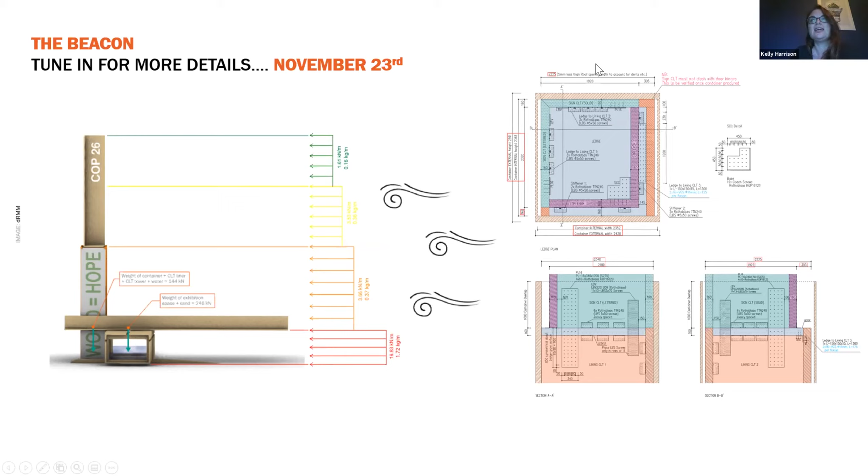thinking to date. And then my last tall timber project that I wanted to mention was the Beacon, which we worked with Nick Milestone and DRMM architects on. This was 24 meters high, and there will be another talk on this upcoming by DRMM and Shingi, who's an engineer on my team, on November 23rd.